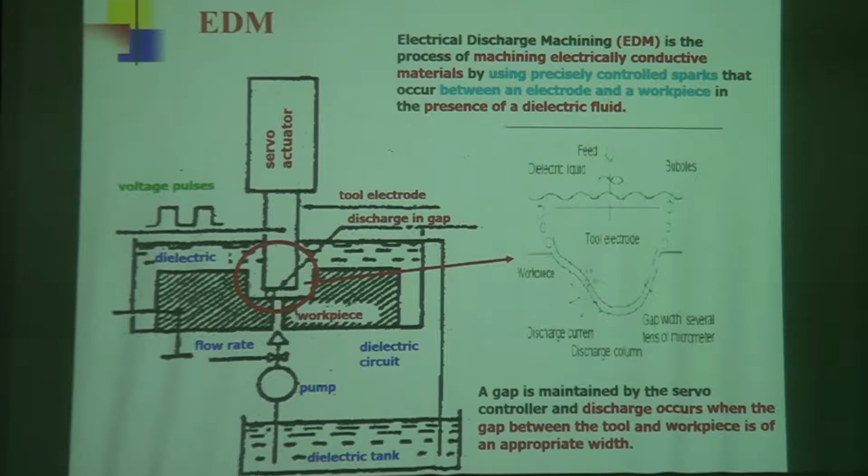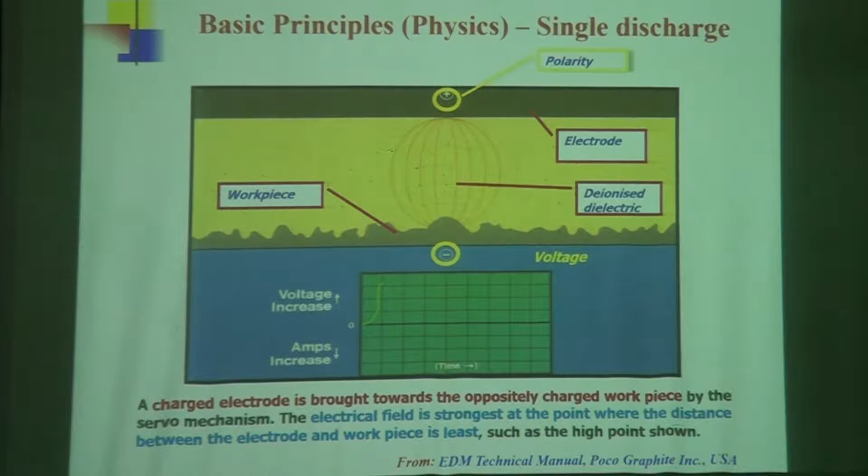Okay, all these things I have already said. That polarity, don't worry about polarity here. The positive polarity is given to the electrode, and this is the workpiece, negative polarity is given here. As the gap decreases, the voltage increases. Here, the ampere, if you look at it, this side is increasing, voltage that side is increasing. Okay, so slowly the gap reduces and voltage increases, stabilizes at that point, and then current starts coming into the picture.

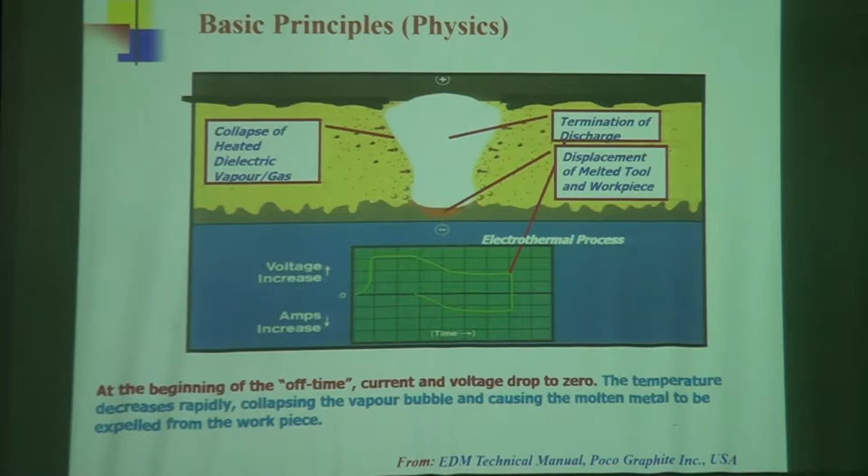Current slowly increases, and when it reaches the maximum, then the spark takes place, and that causes evaporation, and all these vapors accumulate here, collapse of the heated vapor gas, and termination of discharge, displacement of the melted tool and workpiece. They are usually flushed out. Some of the molten materials keep floating, stick to the workpiece or electrode. Okay.

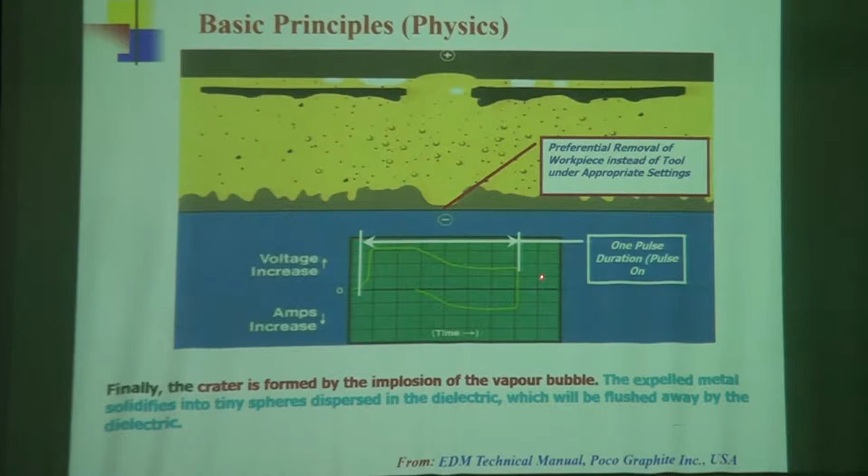This situation is the on cycle, after that comes the off cycle, okay, and it repeats. So some controversy, don't... Here you see the crater is produced, though it is negative polarity, maybe this is softer material, that is harder material, that could be the reason.

And then this whole surface becomes rough. Again, on the next cycle, all the tips are attacked and eroded, and it may even go down further. So that way the surface becomes rough. The electrode also wears off.

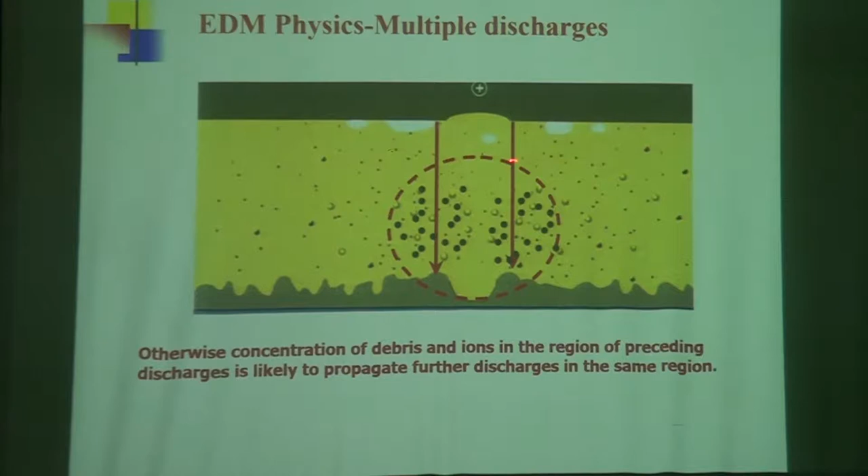These are the molten particles left on the surface or in the surrounding. Again next cycle, it starts from the peak and slowly spreads. So these are all this. Now, each spark occurs between the closest point of the electrode and the workpiece, and from the closest point it goes deeper and deeper.

Now this is interesting to note. When I say it's an interesting point to note, the students in class, indirectly I tell them that is a point to be asked in the exam, but here it is not exam. I am suggesting you take it as a topic of research.

Sparking occurs in a frequency range of 2,000 to 500,000 sparks per second. So if you know the energy of a single spark, then if you know how many sparks are taking place, you can find out how much energy is generated, correct? Now this uncertainty remains, 2,000 to 500,000, where you will draw your limit. From those things, back calculation from energy, you can find out actually how many sparks took place. And when it is more or less, you need to find out what is causing the more sparks, what is causing the less sparks, correct?

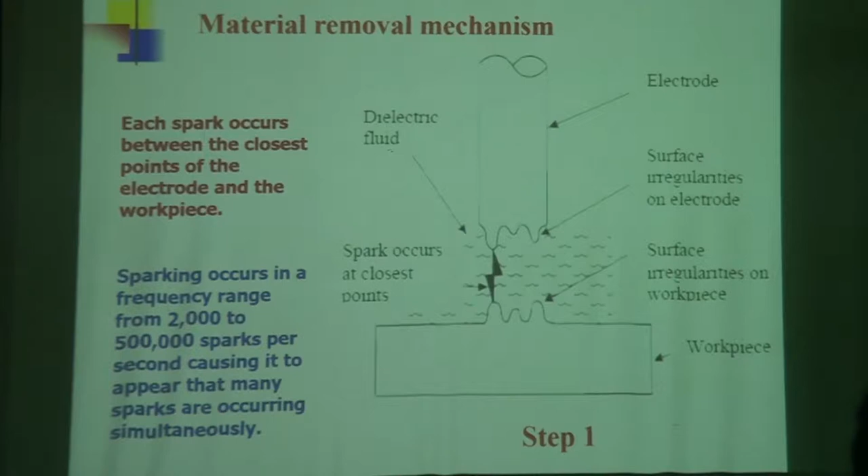And I think Afzal did not do the energy calculation. So all these things you can do. There are plenty of unknown things in the EDM area.

On spark on, electrode and workpiece material vaporized. Every discharge or spark melts a small amount of material from both of them, depending on the polarity and the hardness. So you can even thoroughly study what is the effect of changing the polarity. Is it only the surface finish and material removal rate, or is there any other effect? So those things you can quantify, you can easily write papers.

And don't take a simple journey. When you do research, always think about what it is going to give me. Is it me too, or is it something new? And if it's something new, small or big, take the challenge.

And I think I've quoted many times Einstein's quotation. How many of you have listened to me? Einstein said, engineers create things which had never been. So Einstein thinks that. We'll have to do new things to remain relevant to the community, to research, and to everything, to our job.

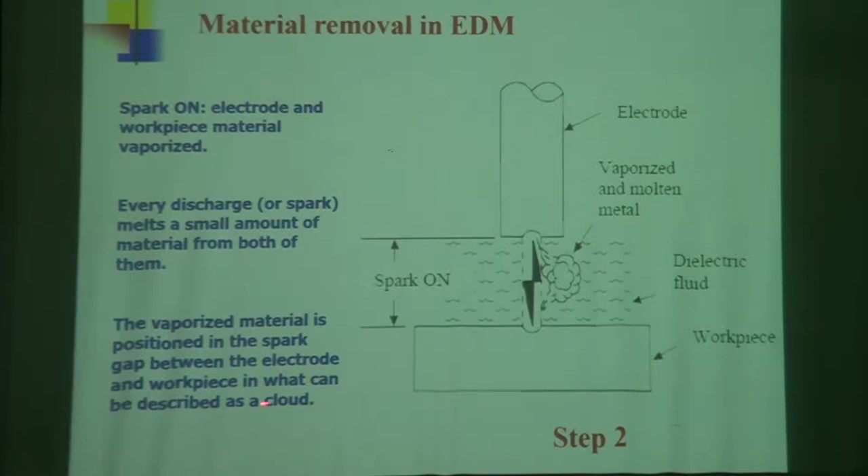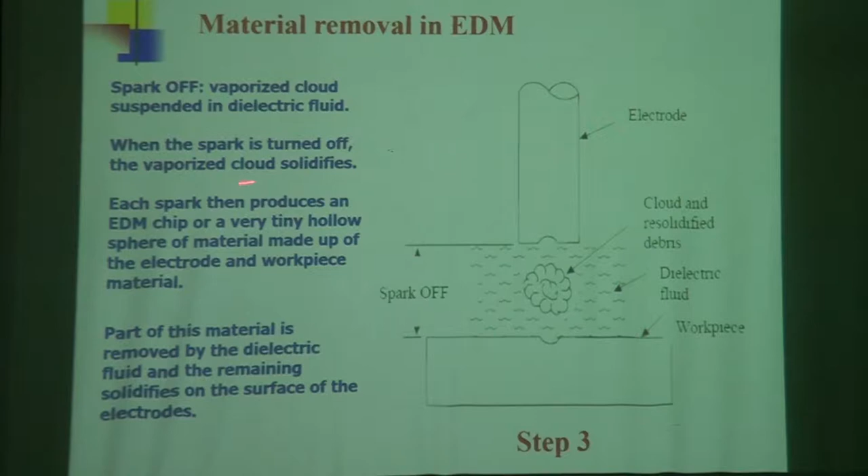The vaporized material is positioned in the spark gap between the electrode and the workpiece in what can be described as a cloud. These are simple things, and this is the cloud. Spark off, the vaporized cloud suspends in the dielectric fluid. When the spark is turned off, the vaporized cloud solidifies. I've already told you all these things, that they stick to the electrode or stick to the surface.

For efficient machining, the EDM chips must be removed from the sparking area. Please remember that. So how can we remove this? What should we do to remove all this debris? By flushing. Removing them is best. If you cannot remove them, what do we do?

We don't allow recast layer if we want to flush them away, but we cannot flush them. Like in Afzal's case, if he had no flushing device, what would have been done? For him it was difficult because the workpiece is too heavy, but usually micro EDM pieces are small. You use a vibration device to vibrate it, to keep the floating objects unstable so that they cannot form the secondary electrode, or stick to any of these things. If they stick, it's helpless. So keep the workpiece vibrating so the particles remain floating.

The gap is changed now. The sparking gap is continuously changing by applying the vibratory motion. Because in EDM the sparking gap plays a vital role, right?

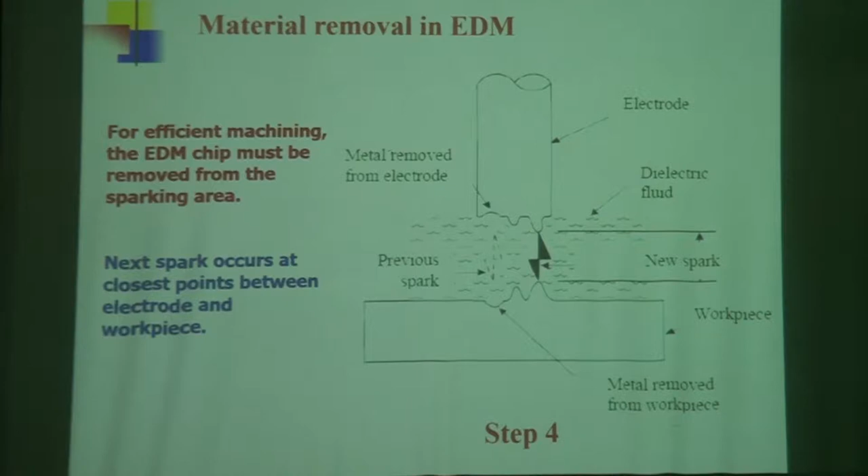Rajurkar, again, put all these things I said into one diagram. Initial gap - the gap closes and spark begins, plasma grows and the gap becomes very narrow, the plasma becomes very large, then evaporation takes place, explosion takes place, and molten materials or vapors come out, flushing is to be done, and another spark comes in. The previous small graph I showed was by Kunieda; this one is by Professor Rajurkar.

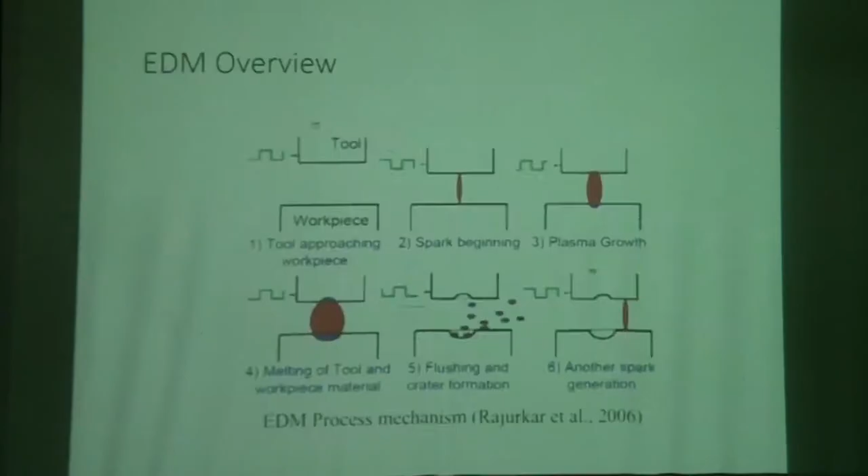EDM system - here comes the servo control system. Two things actually: this is the servo control system to take care of the gap for sparking, and this is the generator, the whole thing. This is where EDM is taking place.

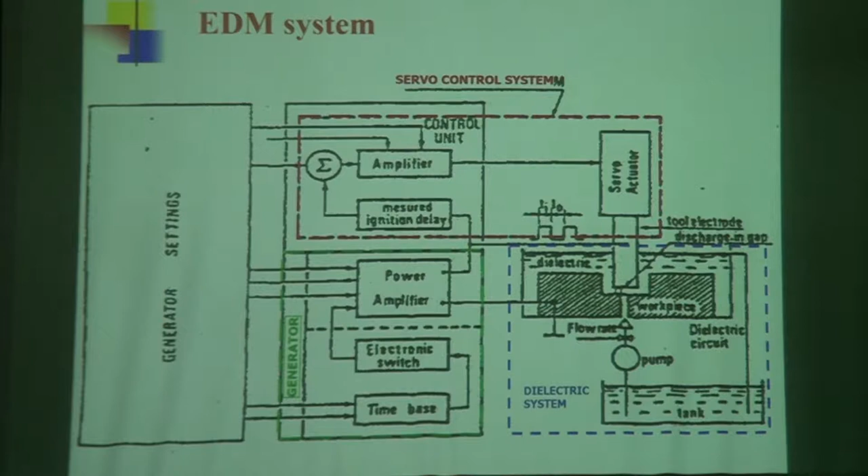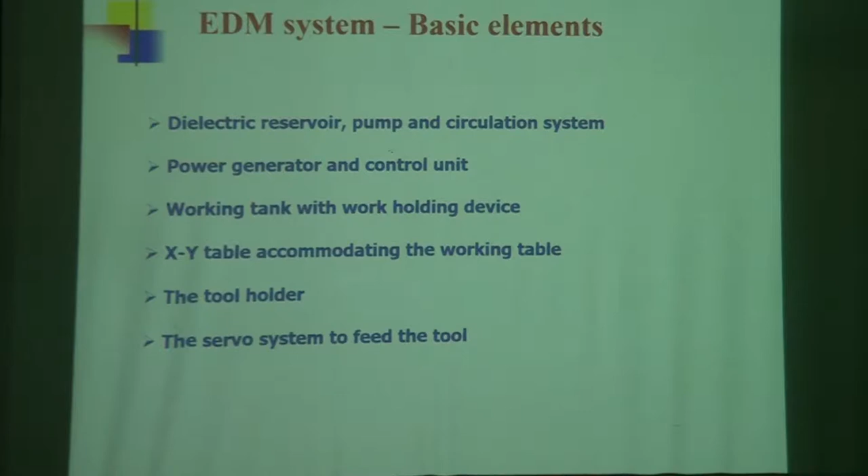Basic elements, I think this is already shown: dielectric reservoir, pump, power generator, working tank, tool, tool holder, servo system. Now there are two types of circuits - one is RC based, resistance and capacitance, another is transistor based.

All the details are there, I'll try to cover quickly, time has become my enemy now. Basically our machine currently is RC based. As you see here, this is the capacitance, and it slowly builds up, and then current goes up. At that point spark takes place, then again starts from zero - voltage goes up, current goes up, and sparking takes place.

Here the stray capacitance is utilized, which is a very small quantity. The benefit of this small amount of capacitance or voltage is that it erodes a small amount of material, so the finish is very good. Our target is to get a very high finish surface, we are not bothered about large amount of material removal. But we get demand from customers - universities don't argue about it, they are happy because they want it for research.

Now we have come out with an EDM power supply which covers large removal, based on transistor as well as capacitor. So if you want very fine machining, you keep the RC circuit on. If you want large volume machining, you make the transistor circuit on, and you can keep both on depending on the amount of material removal you want. What we are trying to establish is that the machine should be able to do machining from fine, small amount of metal removal to large metal removal.

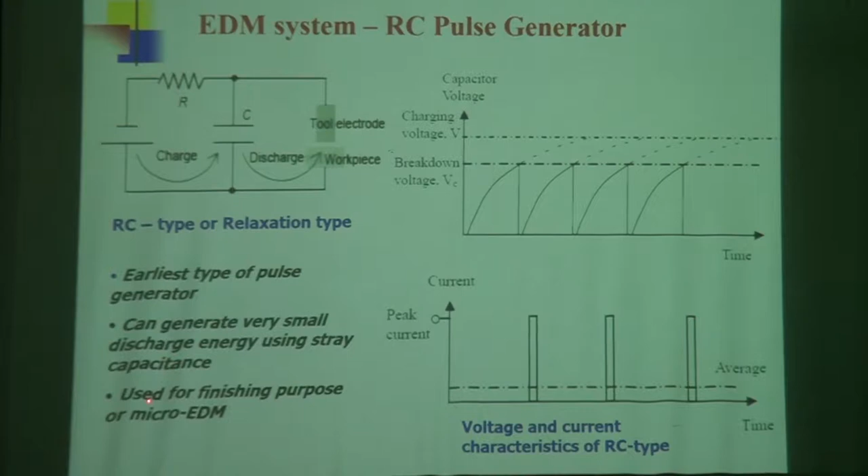RC type, relaxation type - it's called relaxation type. It's the earliest type of pulse generator, can generate very small discharge energy using stray capacitance, used for finishing purpose or micro EDM.

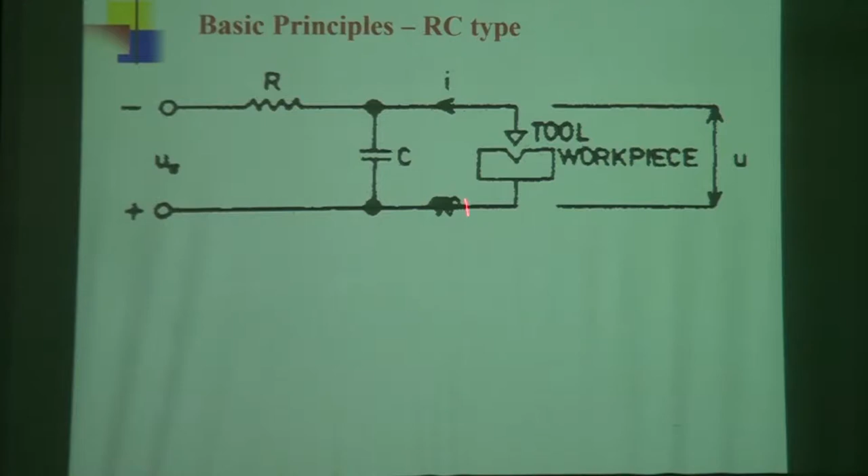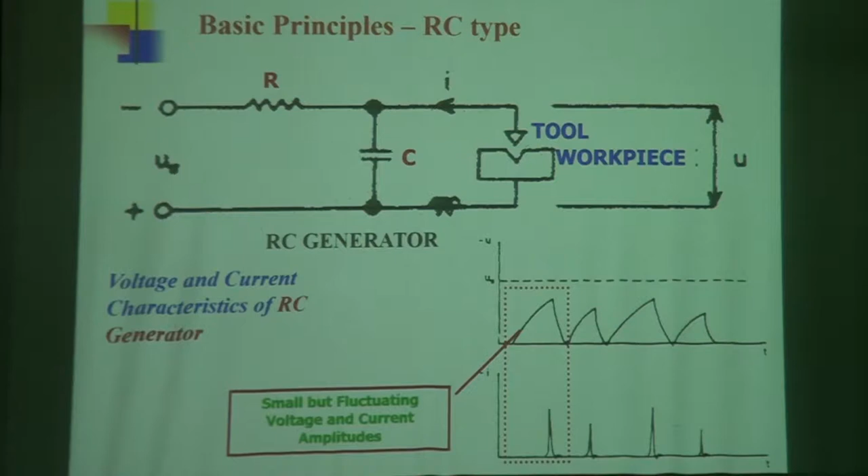And this is the RC circuit - resistance and capacitance. The voltage and current I have shown you, this is the generator, this is the way it is done. Voltage and current characteristics of the RC generator are given here: small but fluctuating voltage and current amplitude.

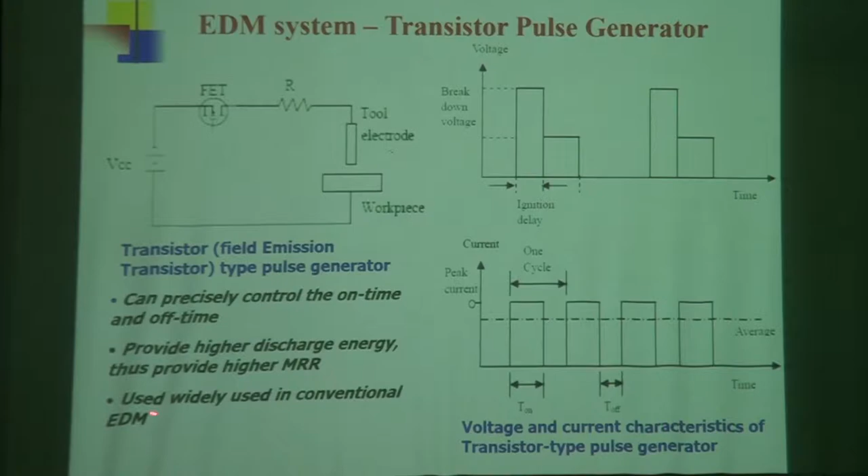And the transistor based circuit - a field emission transistor type of pulse generator. This is very fixed and the amount is large, can precisely control the on time and off time, provides higher discharge energy, thus provides higher material removal rate, used widely in conventional EDM.

So what we are trying to develop is to bring them together. So Prof. Jose Mathew, don't be anxious, we will give you the new power supply if you want.

No, I didn't like to make it public, but since he's asking me, no, it is not free. But you will get a special discount because you are an existing user. Okay, no, and your support is tremendous. We really admire your support. Publicly, I can tell you, one of the best support I get from NIT Calicut.

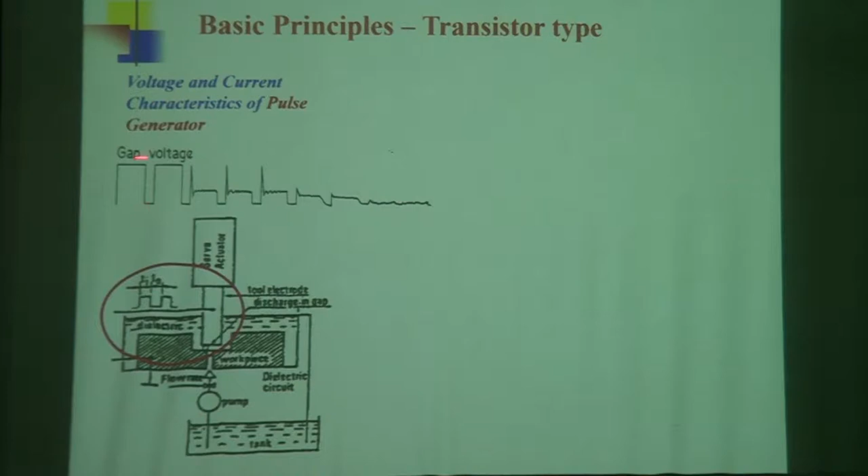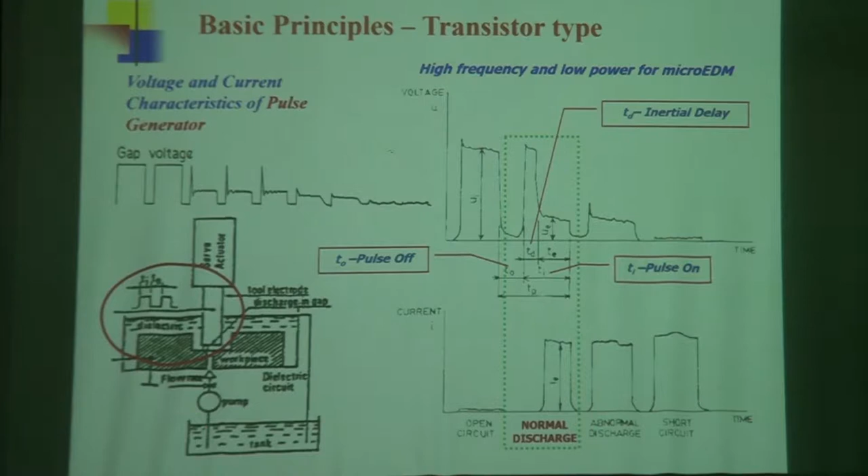Voltage and current, you've seen it is all very fixed value you get. These details, okay, and again it depends, you can get normal discharge or abnormal discharge. So you should be very careful while designing. T pulse on, T pulse off, T pulse on, and high frequency, low power for microEDM. So this way, even for transistor circuit, you can design it to give you low power and high frequency.

So these are all features. Workpiece material, any conductive material you can use, but does it mean that you cannot? All these old concepts are changing. Can you do EDM of non-conductive materials? Sir, you can do it, so you know it. You need to do some doping.

Dielectric fluid is, so when you use dielectric fluid, please look at the working condition. Don't go for kerosene and vegetable oil without analyzing the ambience, without analyzing the working parameters, correct? You may end up getting fire.

So, for electrode material also, the basic principle is that harder the electrode material, less will be the wear. So better to go for harder material, but on the contrary, then workpiece material will be rough. But if you want workpiece to be fine, then you use a softer electrode material, so that you have more wear in the electrode, less wear in the workpiece, because you are doing fine finishing. Of course, the next thing I will talk, then you don't have to worry about that.

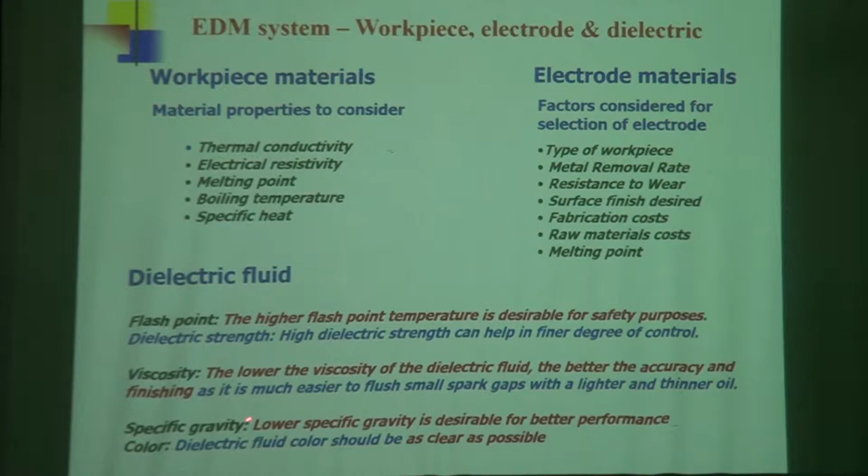Dielectric fluid flash point should be as high as possible, and viscosity, lower the viscosity, better it is. Specific gravity, lower specific gravity is desired.

Process parameters, you will decide based on your requirement. Planning type, so you will have to plan the operating parameters, and machining condition, you will have to monitor the sensing, sense the parameters, and finally based on your performance parameter, what you want, finished surface, more material, and so on and so forth.

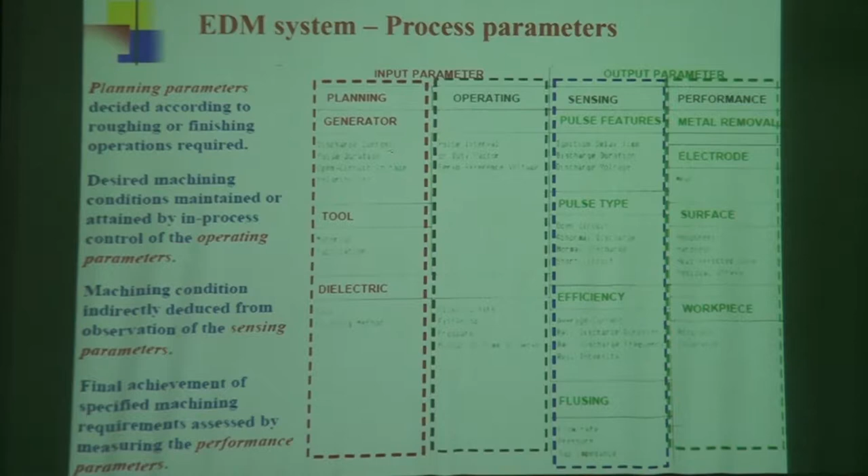Now let me come to the microEDM. So I'll cover about basic principles. Basic principles are same as EDM. Difference being in the size of the tool used when microEDM comes, the power supply of the discharge energy, the resolution of the axis movement.

And here, I'm sorry to say, when I started selling our machine, I had lot of resistance, lot of my junior colleagues from different institutes, I won't name them, they were saying, why you are selling such an expensive machine? Why can't you make a cheaper machine? I said, depends. If you try to get a cheap machine, the performance will be cheap. But I do not want to sacrifice the quality, because you are doing research with it, and microEDM research.

No, our student needs to understand the basics of EDM. Then why do you buy a micro EDM machine? You buy a conventional EDM machine, very cheap, then you teach them what is EDM. And if you teach them EDM, fine, you are feeding them to the industry, they will be happy, industry will say, oh, they know. But at the end of the day, they do 1 year research project on EDM, and at the end they go to the industry, they say, what have you learned? I can teach you in 6 hours. So why did you spend 1 year to do your project?

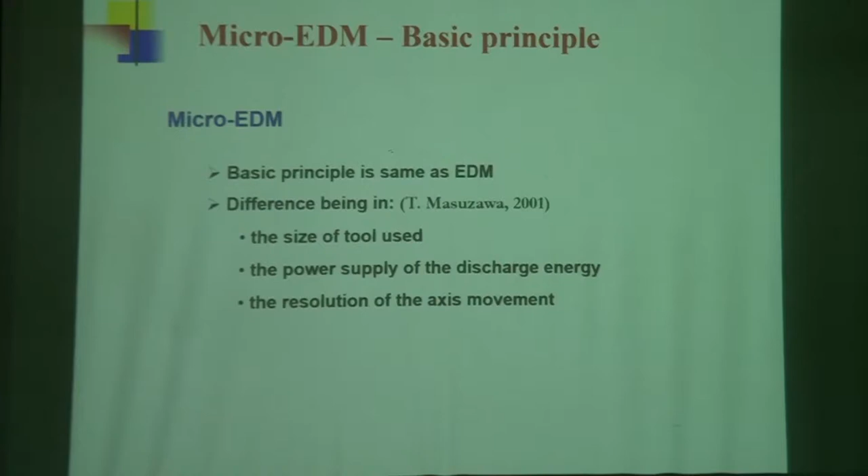Size of the tool is important. Power supply, that's why we went for RC circuit to give very low power. And resolution of the axis, here I stop, resolution of the axis should be very high. If you are trying to get a positioning accuracy of 1 micron, your resolution should be 1/10 of a micron. If you want 10 nano, your resolution should be 1 nano. If you want 1 nano, your resolution should be less than 1 nano. By positioning feedback control you can improve it somewhat, but whatever accuracy you want, the resolution should be smaller than that. So these are basic things, please try to follow.

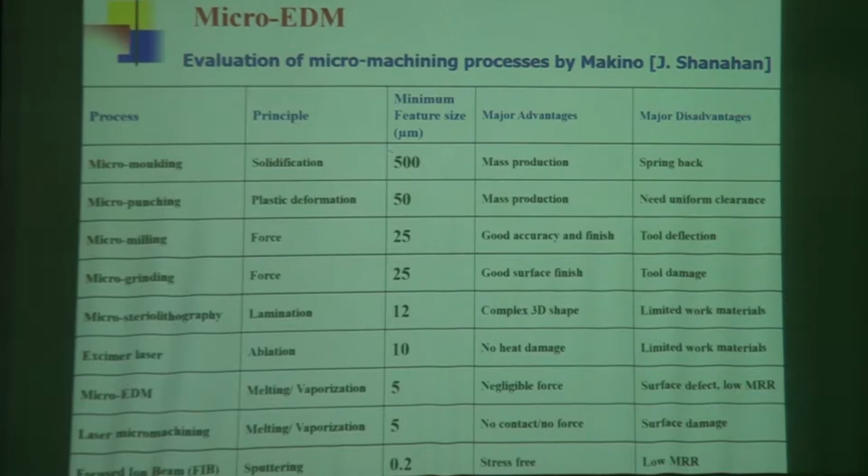This is a comparison of the micro machining processes, manufacturing processes, which can give defined features. I think I should not dwell on it, it's just for your own comparison. There are 6 slides, you can have a look, not very important.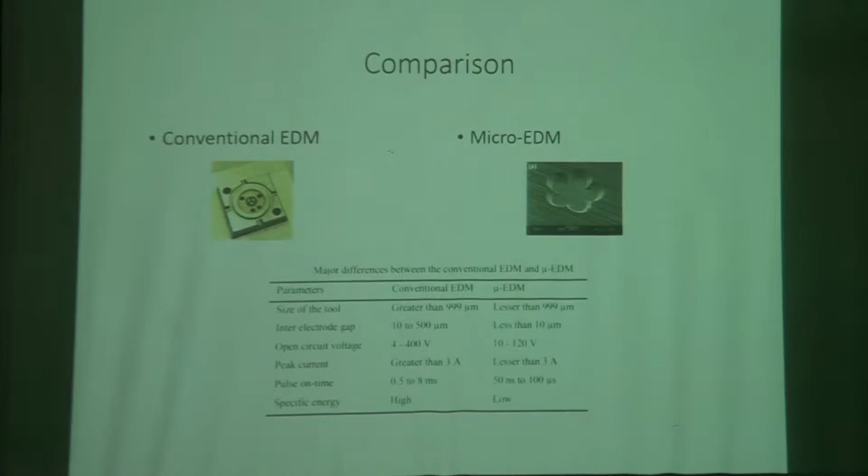Size of the tool greater than 1 millimeter for conventional, and less than 1 millimeter for micro EDM. Inter-electrode gap 10 to 500 micron, and for micro EDM less than 10 micron. Open circuit voltage 4 to 400 for conventional, and for micro EDM 10 to 120 - actually in our case our voltage goes below 10 volts, and on the high side also ours is low, but now we are covering from 1 volt to 120 volt. Peak current greater than 3 ampere for conventional, and less than 3 ampere for micro EDM - though we are also playing with parameters up to 10 ampere. Pulse on time 0.5 to 8 for conventional, and for micro EDM 50 nanoseconds to 100 microseconds. Specific energy is very high in conventional EDM, and very low for micro EDM. So these are the basic comparisons, but if you can cover both, it is still better, which we are trying to do.

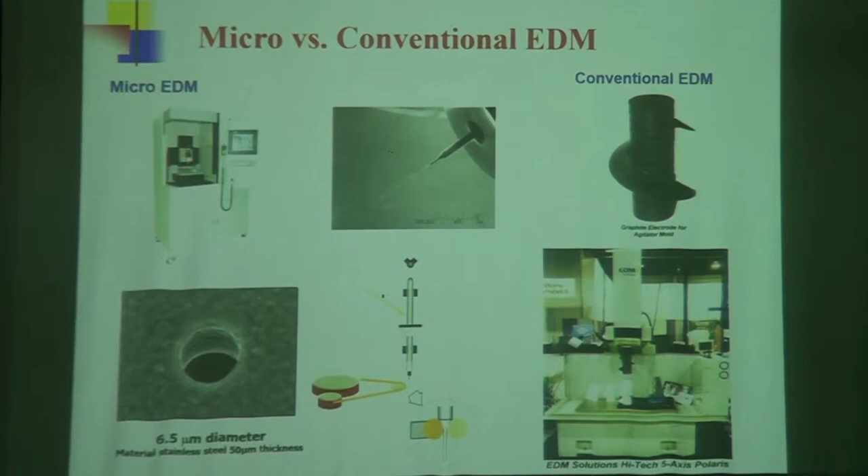Some features to look at: this is conventional EDM, bulky parts, and when it comes to micro EDM, look at the dimension - as I showed you already, 6.5 micron diameter on steel plate, aspect ratio more than 8. This fine electrode is made by wire EDG, which I showed earlier. For conventional, it could be done by EDM, but most of the cases it is done by milling - electrodes are made by milling or turning.

So there are various processes: die sinking micro EDM, micro wire EDM, micro EDM drilling, micro EDM milling. I think I don't have to elaborate on it.

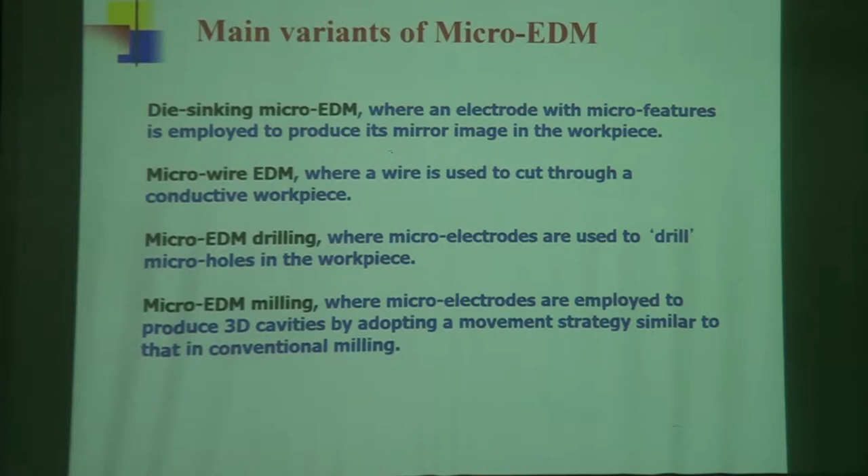Yes, please. Excuse me, sir, I am Deepak from NIT Calicut. Sir, I have a doubt. While making that 6.5 micrometer hole, since that electrode diameter is so thin, won't the flushing cause bending of the tool? Is there a chance for that?

The flushing - I mean the electrode in our machine, in your machine, the nozzle is actually flushing the dielectric to the spark gap, directly to the spark gap. So won't that affect the tool since it's just 6.5, around 6 micrometer diameter? Won't it cause bending?

It didn't cause bending because you are not flushing at very high pressure. The sheet was very thin, and for the 6.5 micron hole, electrode diameter was 5 micron only, and flushing was not flood flushing - the plate was a very thin plate. It was sunk inside, and it was quite fast. Bending didn't take place. You should not be flooding on it.

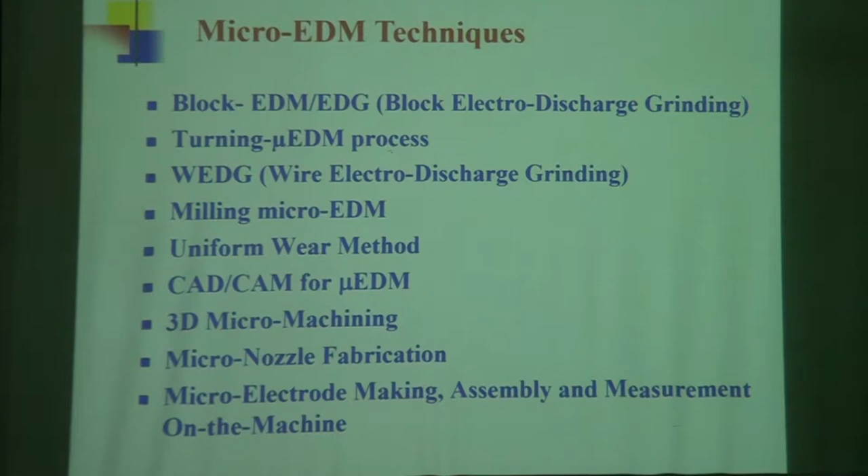I'll try to cover some of them. Block EDM we have already discussed, so we should not dwell on it. This is more details of the block EDM, you have seen these diagrams.

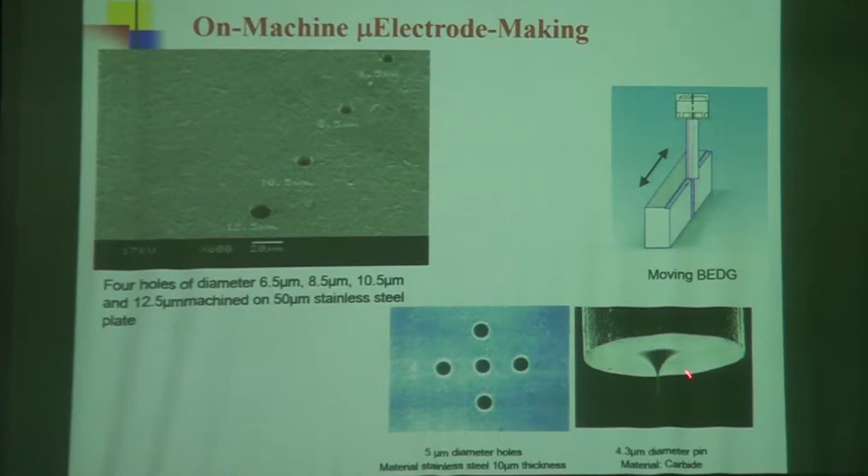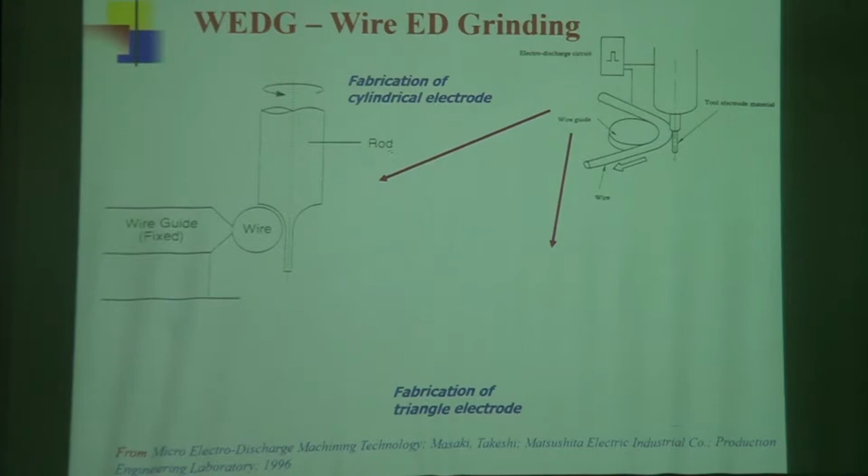We did, by block EDM, quickly fabricate the electrode, and for fine finishing we use wire EDG as well. So we got these examples. This is by wire EDG, you get a fine electrode, with that you can get this. Another example of wire EDG to fine machine the electrode, and on-machine electrode making by wire. All these things we'll skip quickly.

MicroEDM milling is usually for die sinking, but you can do microEDM milling as well. You can generate a surface and scan it, continue to move, and when there are steps and so on, control the gap. These things you can pick up as a research topic and continue on it.

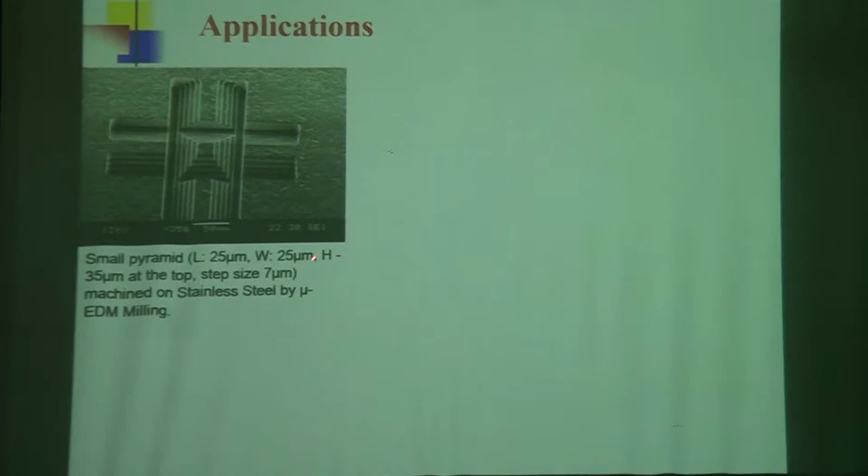Applications by microEDM milling: we generated a feature I showed earlier, a small pyramid, 25 micron width, bottom is 25 by 25 micron, pyramid is 25 micron by 25 micron at the tip, height is 35 micron at the top, step size is 7 micron, done by microEDM.

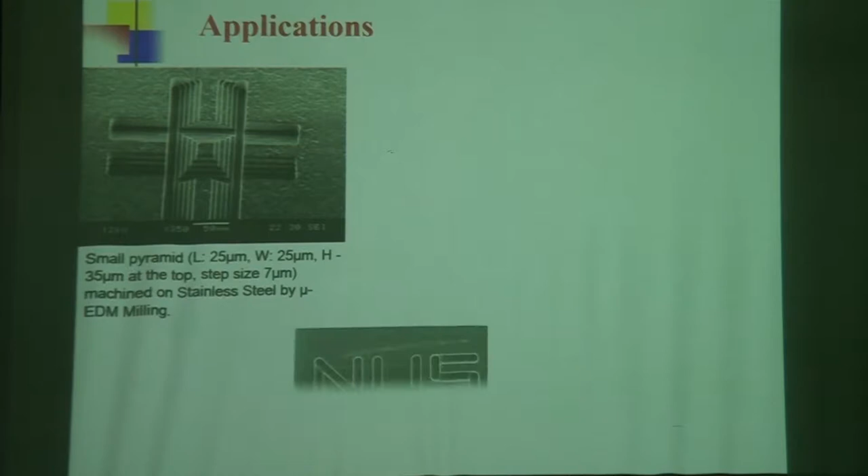All these things can be done, NUS written, and this is a Spinneret. One Chinese company bought it, they want to flow their thread while making textile.

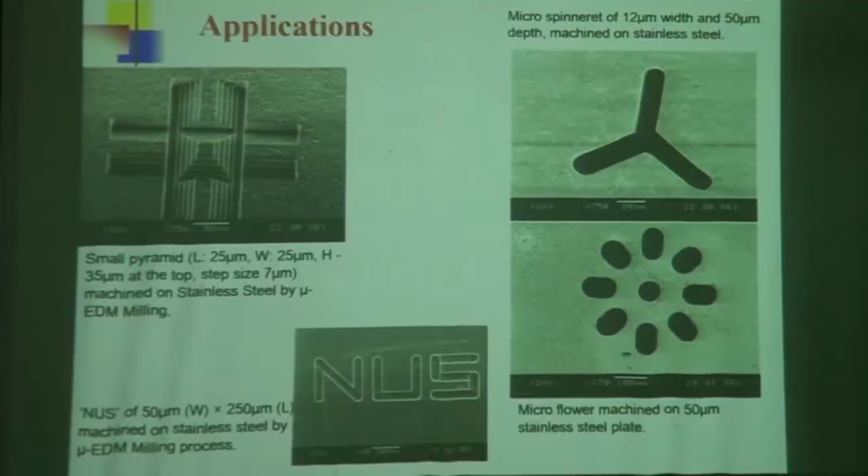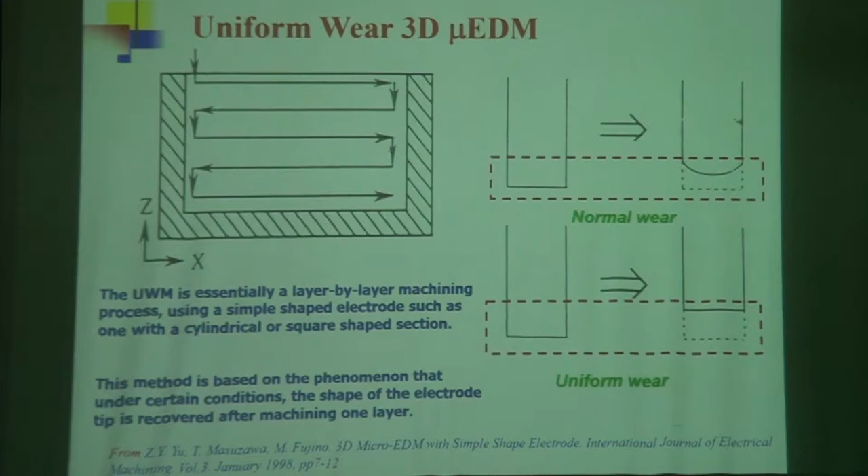Uniform wear EDM: normal EDM wear takes place like this, and then you can control it. Every time in off cycle you do some machining to bring it to the fine shape, and this way when you do milling, you continue this path, don't come back, you reverse the path, and overlap the path to make it more uniform. So these details are there.

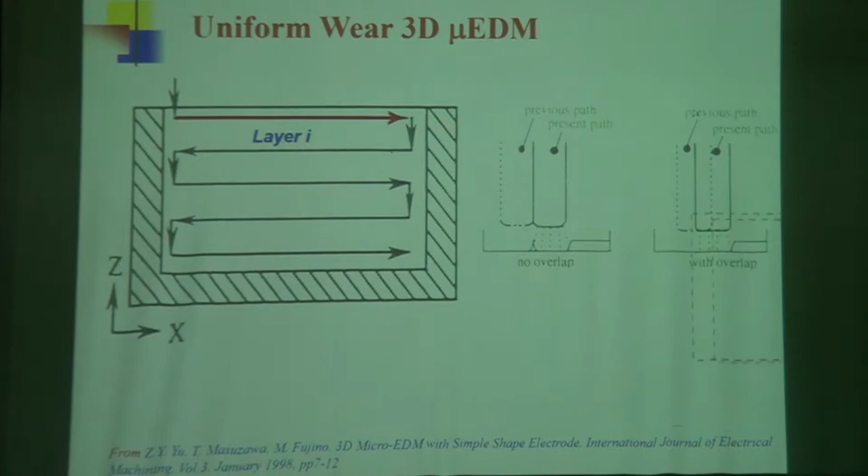There are various ways of reversing: straight reversing, longitudinal, horizontal. Layer i, then for the next layer you come this way - reversal of the path. These are all details, you can read the notes. Should I go slow or should I just quickly finish? Nothing much to learn here.

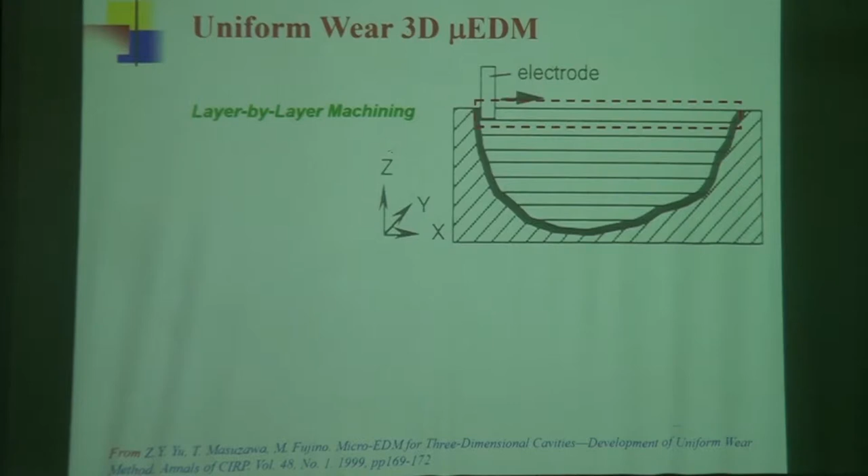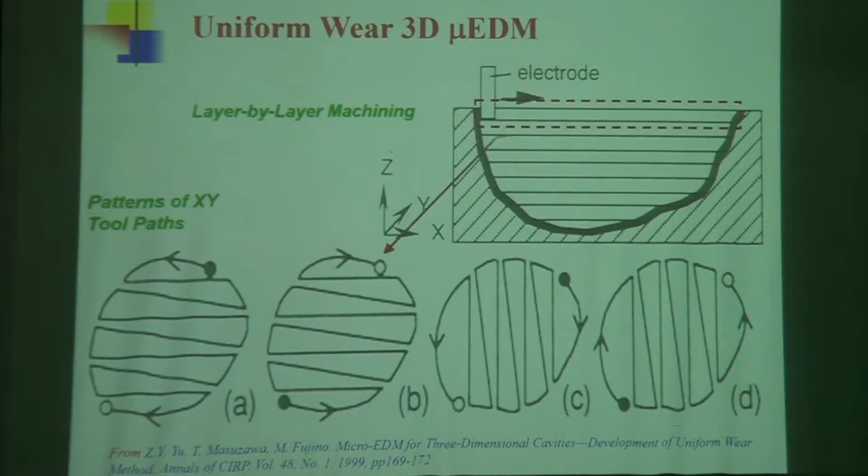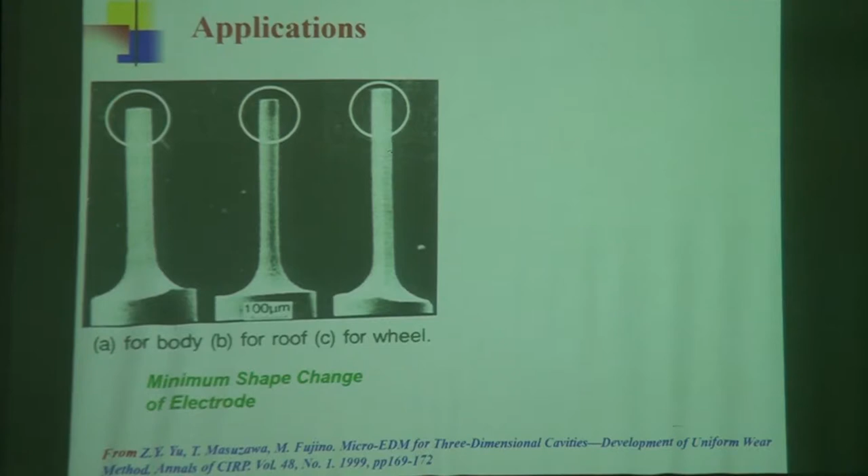For 3D objects, you do this zigzag path, this way or that way, patterns of XY paths. These are techniques and applications. One car body was fabricated using this uniform wear electrode method. These are all applications, for making an electrode.

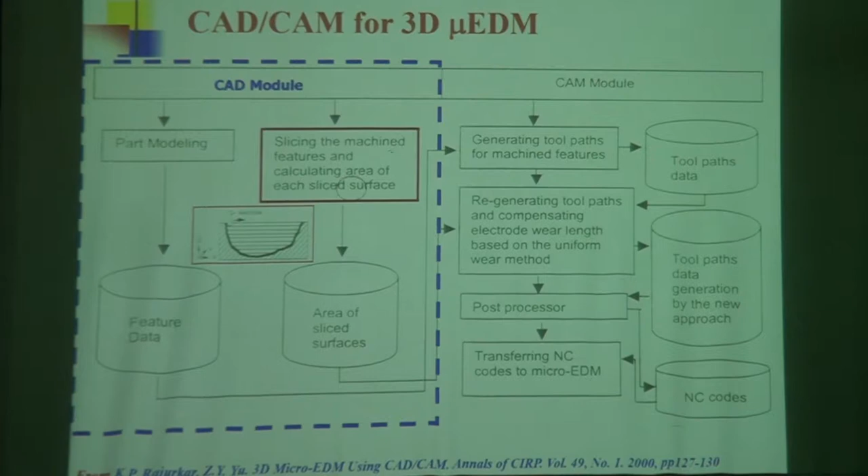CAD-CAM, I should not talk about CAD-CAM. You'll have to generate CAD data, then convert it into CAM data, and I think one of my students, Dang, developed a software for it. So it's all 3D microEDM, these are the examples. I quickly skip this.

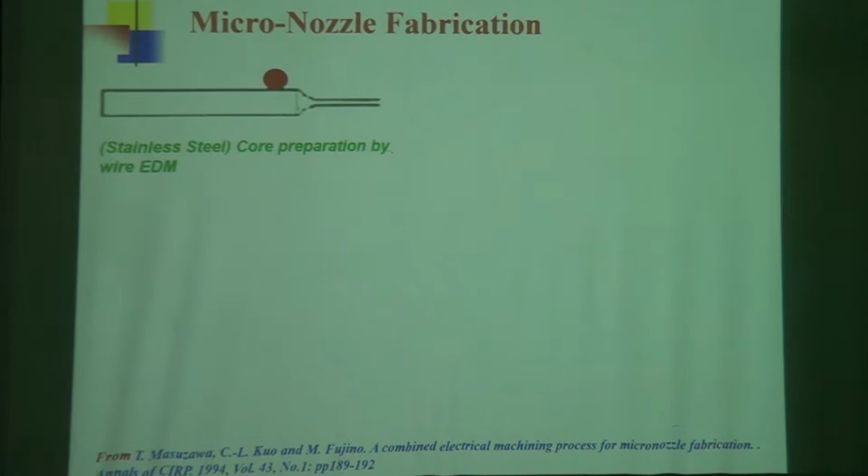Nozzle making was proposed by Professor Masuzawa, Tokyo University. Finally, he gets the mold to make needles. From there he makes micro nozzle, and commercial machines are there.

This I can skip easily. By the way, Panasonic no longer makes these machines, they are using our machine - and Cyrex. Good thing they are using our machine, Cyrex machine. And micro tools machines you have seen, I'm not going to repeat here.

Now this is interesting, I think I quickly touched on it. EDM is supposed to be a rough process. You can get micron accuracy, but our challenge was to get nano accuracy. Have you heard about that? In EDM you can get nano accuracy, nano finish, mirror finish.

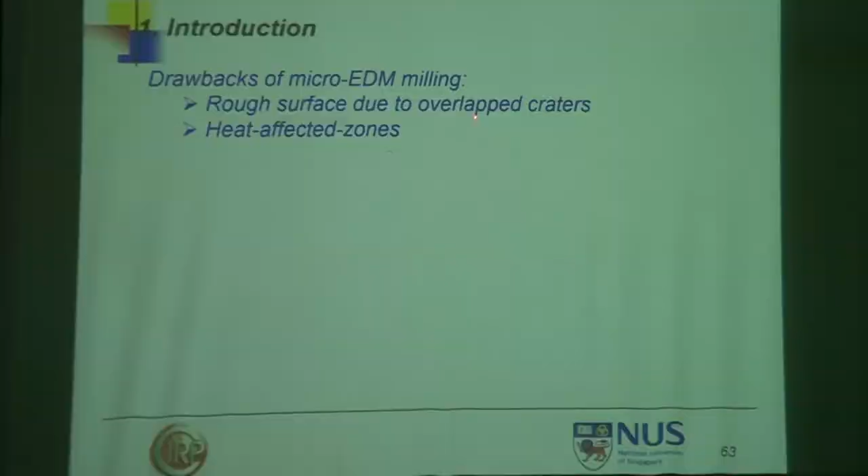When I submitted this paper to CIRP, they accepted it, not quite believing it could be done. The chairman of the committee was Professor Rajurkar, secretary was Professor Kunieda. They were happy, and Dr. Kunieda stood up and said, Professor Rahman, being a scientist or engineer, today he will be a magician, but he will prove magic can be science or science can be magic. Let us see how he does it. So this is the journey - he thought what I said wasn't right, so we analyzed the drawback of micro-EDM: rough surface due to overlapping craters and heat affected zone.

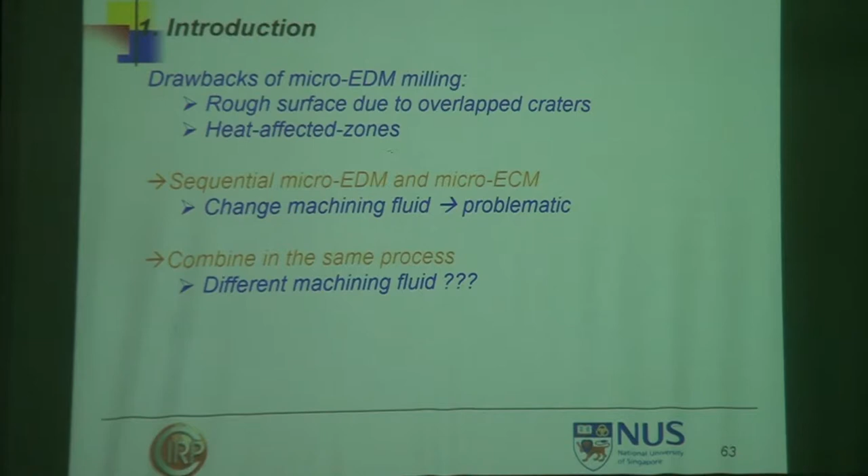So sequentially what we do is microEDM followed by microECM. Changing machining fluid is problematic when you combine different machining fluids in the same process, you have to change the fluid. So the approach is microEDM is done in dielectric fluid, microECM is in electrolyte. So one is non-conductive, another is conductive.

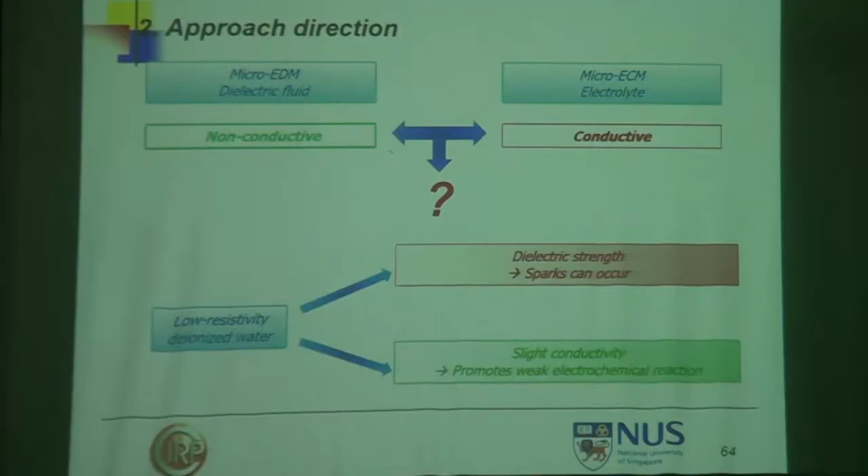Can we compound them together? The clue is low resistivity deionized water. That means you find out what the resistivity should be. The dielectric strength is strong enough so that spark can occur, which is 78 to 80%, with slight conductivity, which promotes weak electrochemical reaction, ECM. So that's the clue.

You can do simultaneous EDM and ECM milling, which is called SEDCM. So the clue is low resistivity deionized water and short pulse. If you remove a lot of material, then finishing will take a long time. During pulse off time, your finishing will not be completed. So short pulse is needed, so that dissolution is localized and a small amount of material is removed.

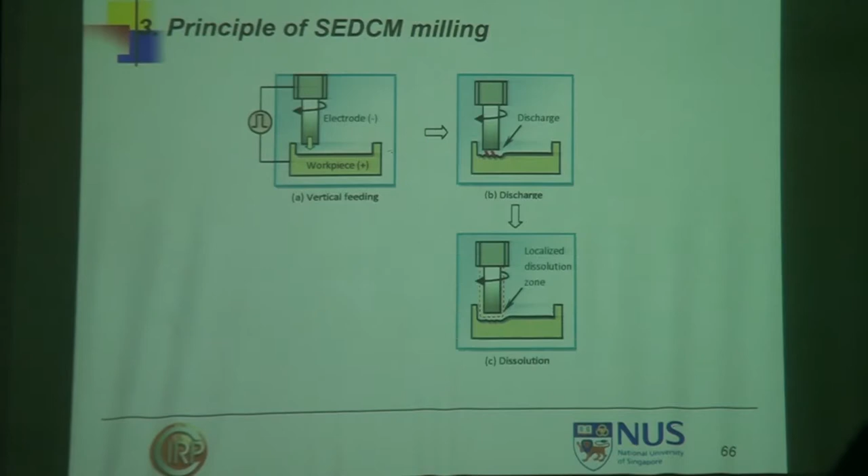And this way you proceed, dissolution takes place, and then you give horizontal feed and go to the next cycle. So this way you continue from here to here, to here, to here, here to here, then you go direct there, come here, and continue.

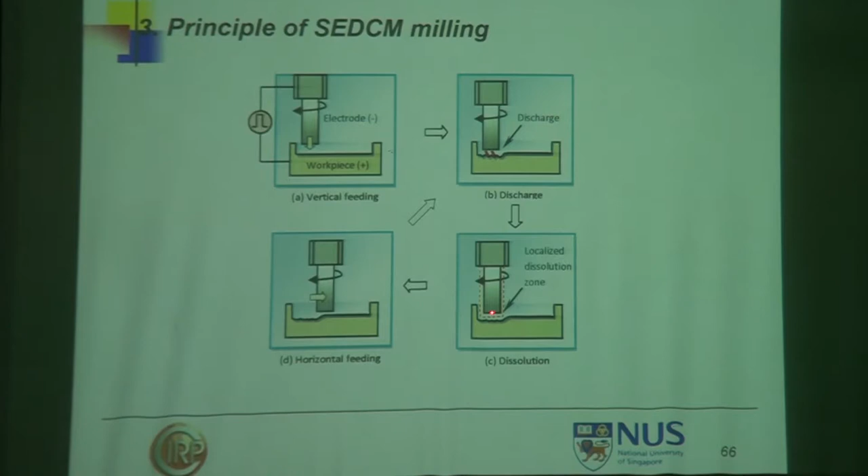Then I give you the results. Initially, scanning feed is 50 micron per second in this case. This case is 30 micron per second. And the third case is 20 micron per second, and then 10 micron per second feed rate.

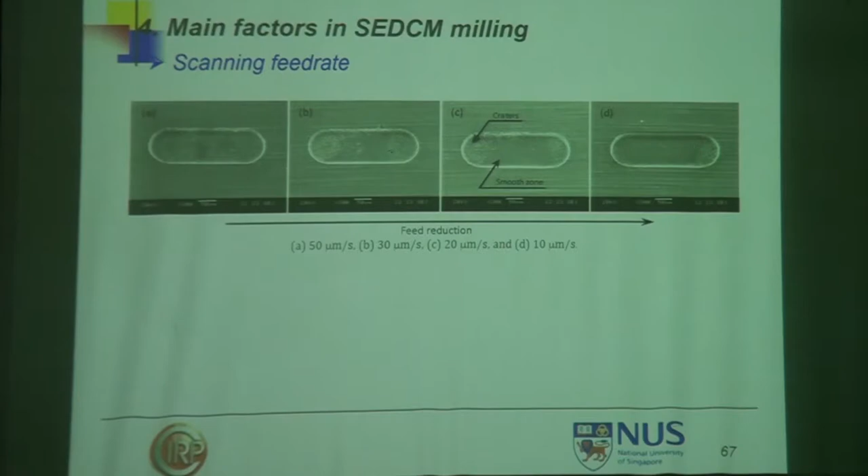When you have a very large feed rate, the surface is rough because you have not given enough time for ECM action to take place fully. At 30 you see some finished surface, then a bigger finished surface, and finally an almost complete finished surface. So the clue is the feed rate should be slow, and crater size should be small, low material removal rate, slow speed, two things, and low resistivity deionized water.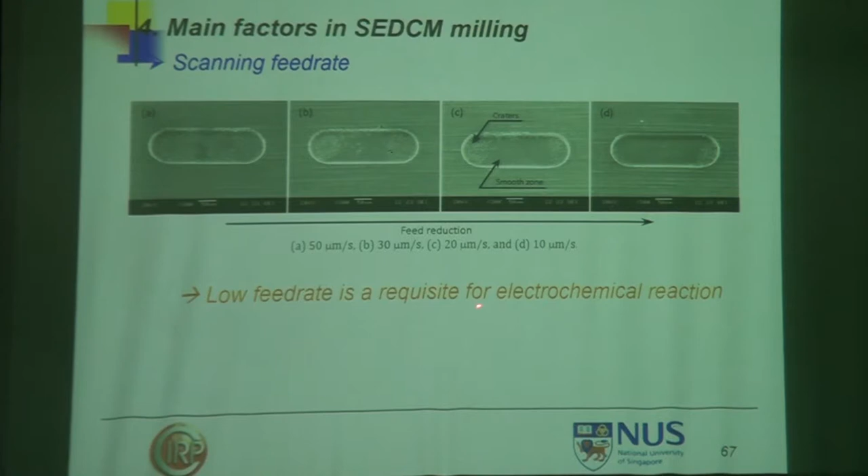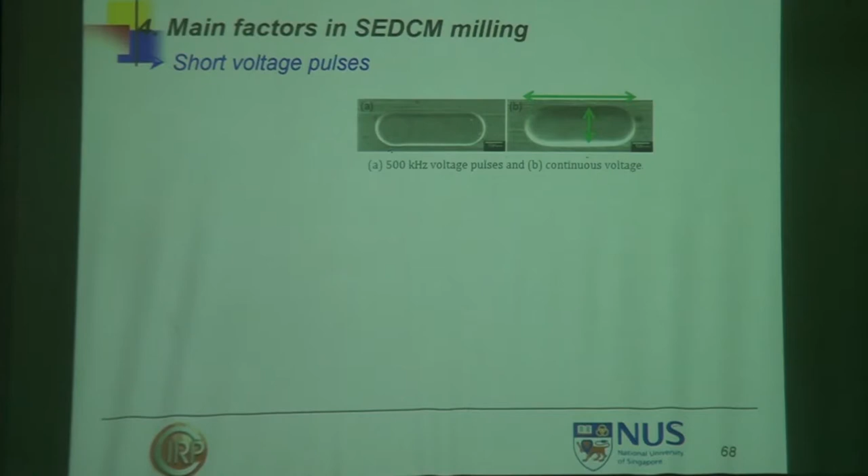Low feed rate is a prerequisite for electrochemical reaction. And short pulse - please remember, you will have to have short pulse. If you have 500 kilohertz and continuous pulse, dimensional error takes place and surface is bad. If it is short pulse, then surface dimensional accuracy is maintained and surface finish is very smooth.

So it should be a localized dissolution zone. Layer depth should be small. If you have 1 micron, surface is not very good. If you have lower depth, 0.5 micron, surface is better. So smaller layer depth is another condition to be fulfilled.

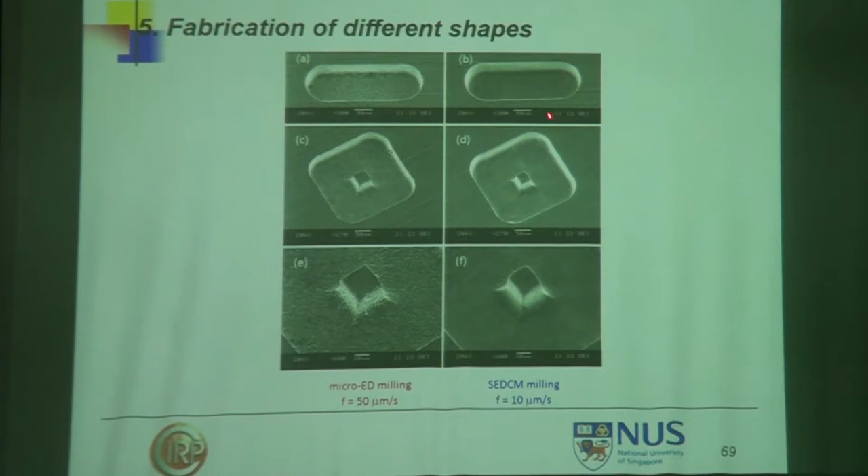Then fabrication of different shapes. These are different shapes you can do. Again, whether you do it at feed rate of 50 micron per second or 10 micron per second, that makes a lot of difference. At 50 micron per second, only EDM is taking place, and at 10 micron per second, EDM plus ECM is taking place.

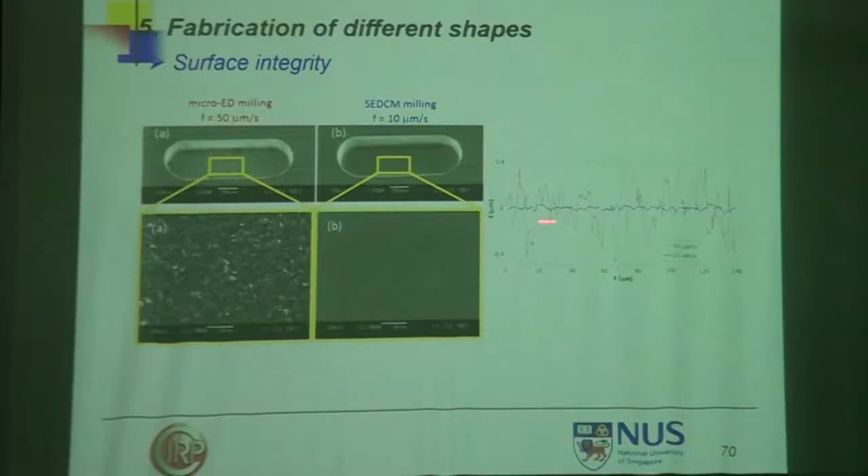Now, to get the concrete result: at 50 micron per second with short pulse or normal pulse, you get a very rough surface, and with 10 micrometer per second short pulse, you get a complete nano surface. Just looking at the surface is not enough, you look at the graph. The red line is this one, only EDM taking place. When both EDM and ECM are taking place, that's the blue line.

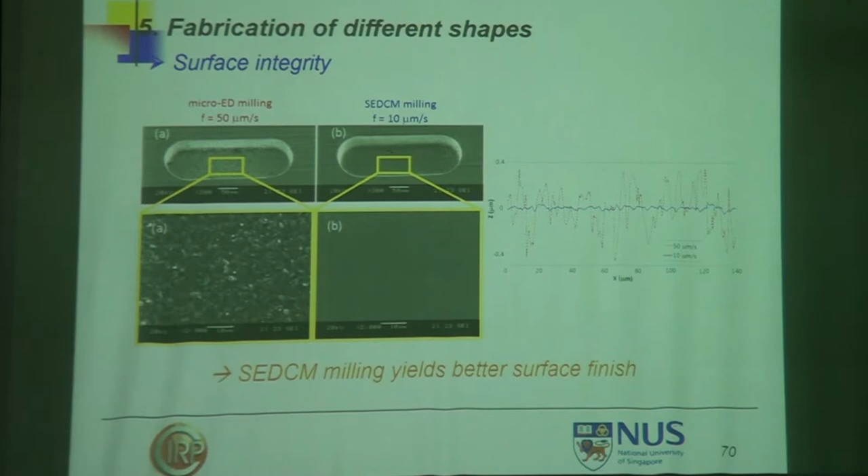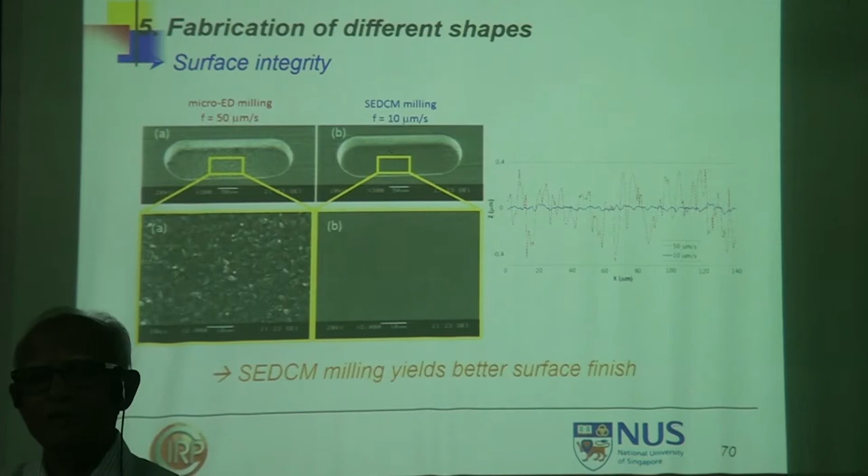If you see the concrete data, simultaneous EDM and ECM gives better surface finish, how come? Results are not written here, sorry, it's an old slide. This surface roughness - the values are not written here, but believe me, it is correct. The red line surface finish is 142 nano. For the blue line, it is 22 nano. You get a complete mirror surface when you do EDM and ECM together.

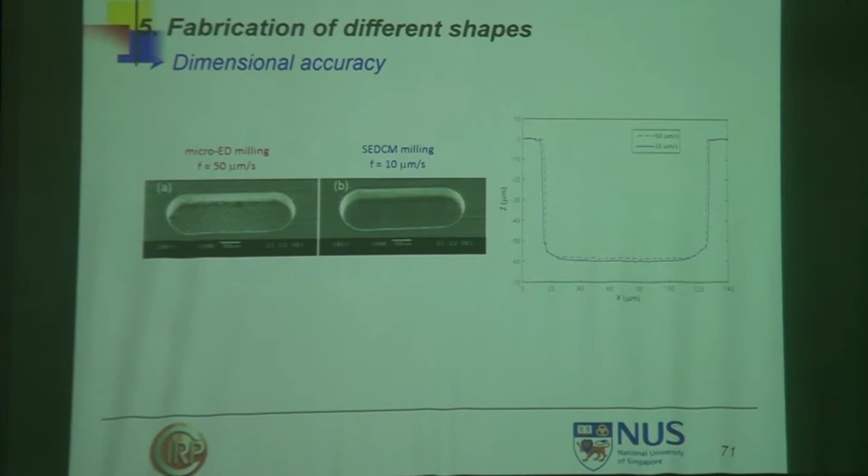How come? Okay, and for short pulse and slow speed, you get good dimensional accuracy as you see it. And the heat affected zone is removed by electrochemical reaction.

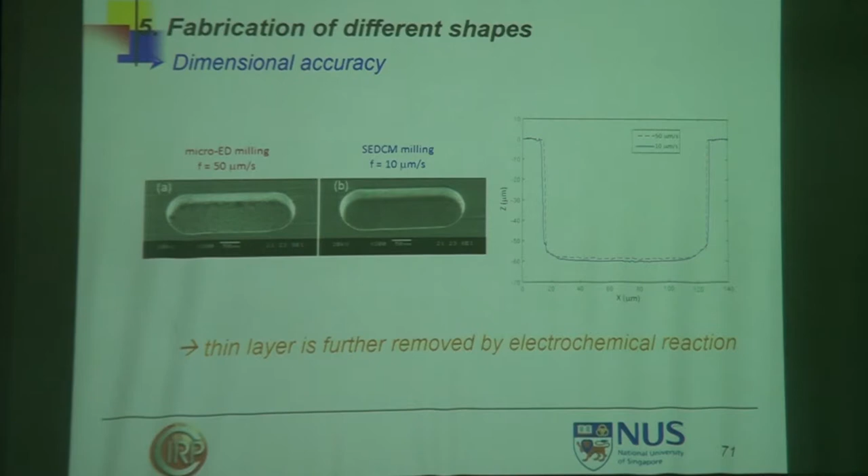Good afternoon, sir. On machining micro holes using micro EDM, how do we remove debris particles apart from using vibration? Is there any other technique, like a flushing device? If I'm going for a larger depth, how will the flushing remove the debris particles, and will the fluid pass through the clearance between the electrode and the workpiece?

I didn't get the question. How does the flushing work to remove debris particles in the clearance area between the electrode and the workpiece? It may be in microns. Will the fluid particles enter the sparking region? So he's asking: the gap between the tool and the workpiece is very small when you do micro hole drilling, so how will you remove those small particles in that small gap? Okay, one option is the vibration device.

Another thing is, how small is your hole? Suppose if it is 50 micron. Okay, if it is more than 100 micron, I request you to use a pipe electrode. With flushing, you can control the flushing pressure and all the debris will be washed out. If it's a small hole, I think you'll have to go for vibration.